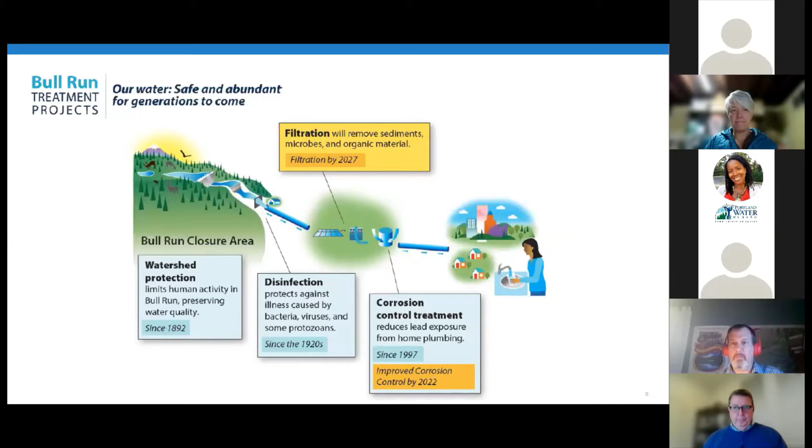Our improved corrosion control treatment project is currently under construction at our Lusted Hill facility. We're nearing the end of construction and will be beginning startup and commissioning in efforts to get that facility online in April of 2022. Most of the recent work has been continuing to connect to some of our existing systems at Lusted Hill and get those new systems up and running.

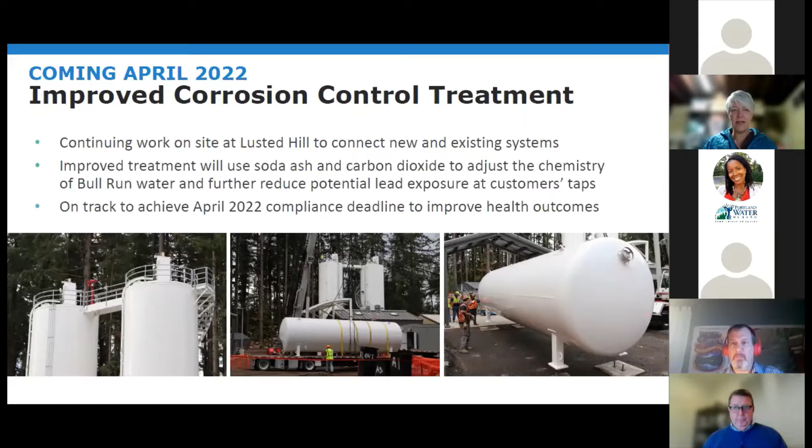The improved corrosion control treatment will use soda ash and carbon dioxide to adjust the chemistry of the Bull Run water and, as I mentioned, further reduce the potential lead exposure at customers' taps. We're on track to achieve our April 2022 compliance deadline to improve health outcomes. These are some photos of our site, with our soda ash silos on the left, and a carbon dioxide tank being delivered.

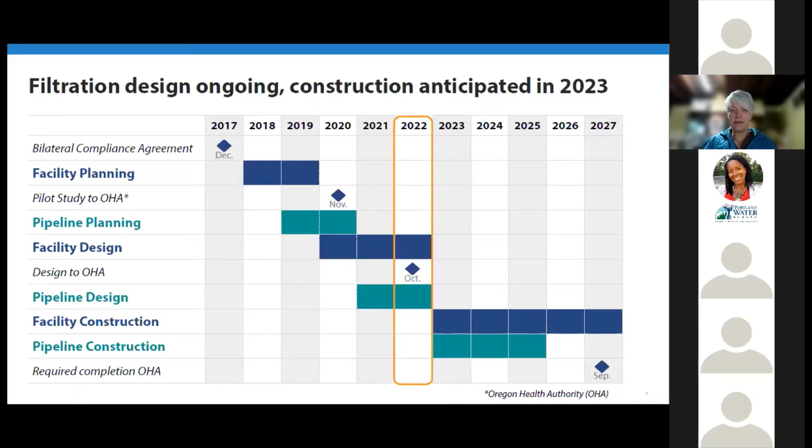And here we are in 2022, where we're continuing design of the filtration facility and the pipelines. We'll be submitting our design to OHA, the Oregon Health Authority, in October of this year, and anticipating starting construction in 2023. And with that, unless there are any questions, I think it's time to turn it over to Ken for a pipeline update.

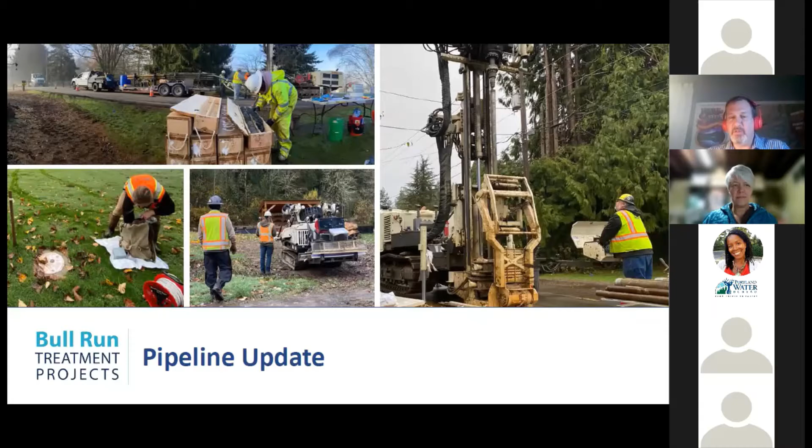Okay, so I'm Ken Ackerman with the Portland Water Bureau, and I'm leading the pipeline portion of the filtration program. Probably if we can go to the next slide.

Just an overview of the schedule, very similar to what we just saw. Planning was completed in '19 and '20. We started design in 2021. We have a design consultant that started a year ago, almost to the day, and they were very busy. We were out last spring doing a lot of work in the roads and on private property along the alignments, and then we had some additional information from field work in November and early December of last year. We'll continue through design this year and anticipate construction starting next year, continuing through 2027.

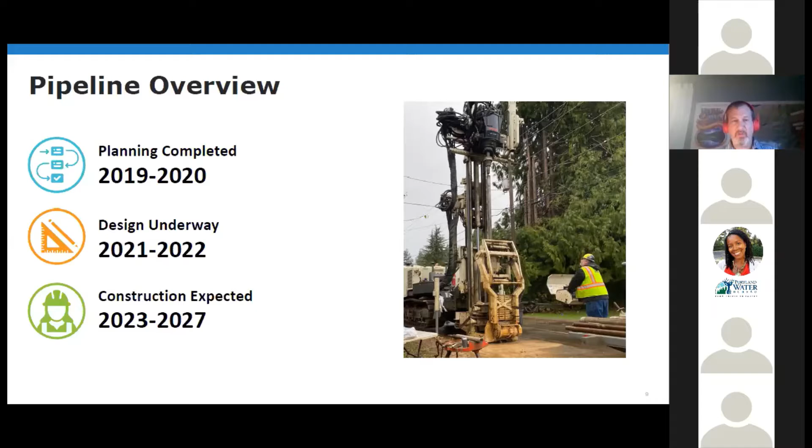I know we have some people here that haven't seen the overall alignments, so I want to run through those, and there are some changes here from what people have seen in the past. I'll start on the southeast side on our unfiltered water, which is the green on the right side of the picture there, starting at our Hudson facility.

We have an existing facility at the south end there, and we'll be connecting into that. We'll run a single pipe from there, crossing Lusted Road, in an easement we purchased back in the 80s along some private property, a 100-foot wide easement. Up north, we'll cross Dodge Park Boulevard and then cross Bear Creek. We'll be boring under Bear Creek, so we won't dig across it, but go underneath without impacting it, continuing in the easement up to the Multnomah County line, where we'll turn about 90 degrees to the west.

That's where we'll meet up with our second pipe that connects to the existing pipes in Lusted Road. We have all three of our existing pipes that supply water to Portland in Lusted Road at that point, so we'll be connecting into those. The two pipes will become parallel, and at that point we'll enter a tunnel. We'll be digging a tunnel from below, or east of Dodge Park Boulevard, under Dodge Park Boulevard up to the filtration facility. At the filtration facility, we'll have a shaft dug straight down, tie into the tunnel, and the pipes will come up onto the filtration site.

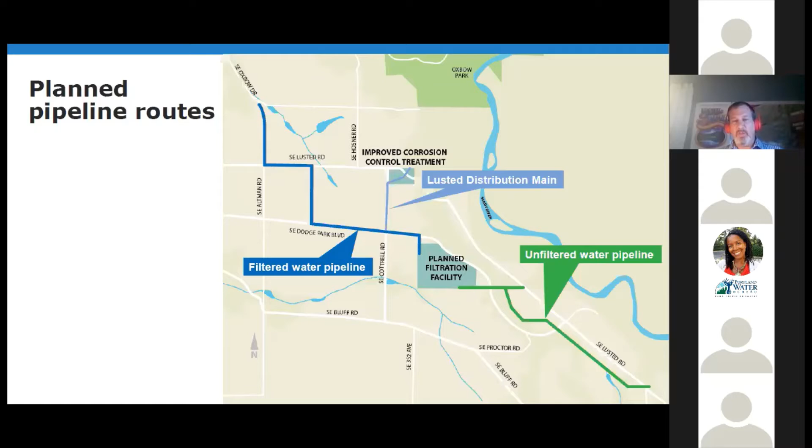So with that, the next slide, we are going to introduce Joe Cecil. We have hired our contractor, our CMGC, it's Bull Run Conveyance Partners, and Joe Cecil is leading their effort and just actually got a signed contract today. So Joe is just on board. We thought we'd bring him, have him introduce himself and the company a little bit, and then he will be back in April to talk more once he gets up to speed on what the project is. So Joe, with that, I'll introduce you.

Excellent. Thank you, Ken. I appreciate it. And good evening, everybody. As Ken said, my name is Joe Cecil. I'm the pre-construction manager as part of the Bull Run Conveyance Partners. As Ken referenced, we're the CMGC on the project for the Bull Run Pipeline project. Excited to be joined as part of the program and part of the team. And as Ken said, we just had a signed contract this morning, so we're just starting and just getting involved.

Our first task is the pre-construction effort, working closely with the program team and all the work they've done to date, along with the design team, focusing on safety, constructability, and minimizing disturbance and impact to the community. We're working on how we're going to sequence the project, traffic control associated with the project, and preparing our overall construction management plan to put all the procedures and process in place before we move into construction in 2023. Our focus in pre-construction is to have a successful, safe construction project that reduces and minimizes any impact to the community, any negative disturbances. So excited to be part of the team and excited to be working with everybody on it.

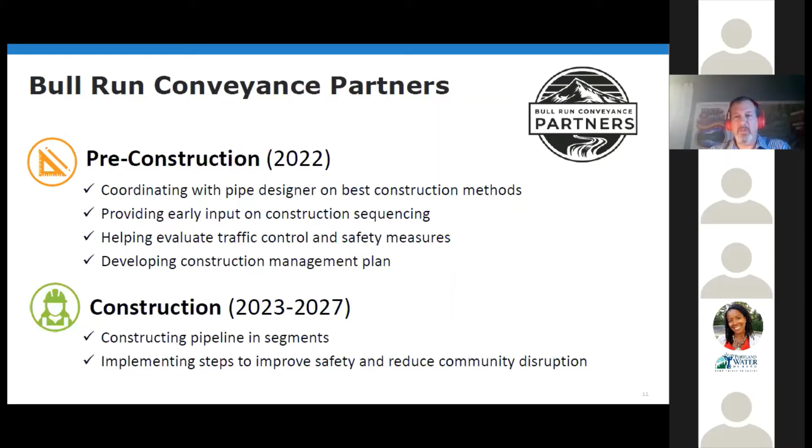All right, I believe Dave is up next. Program update, the facility update.

Okay, well good evening everyone. Glad to be here with you in this new year. And I have the opportunity to talk a little bit about what's been happening with the filtration facility itself.

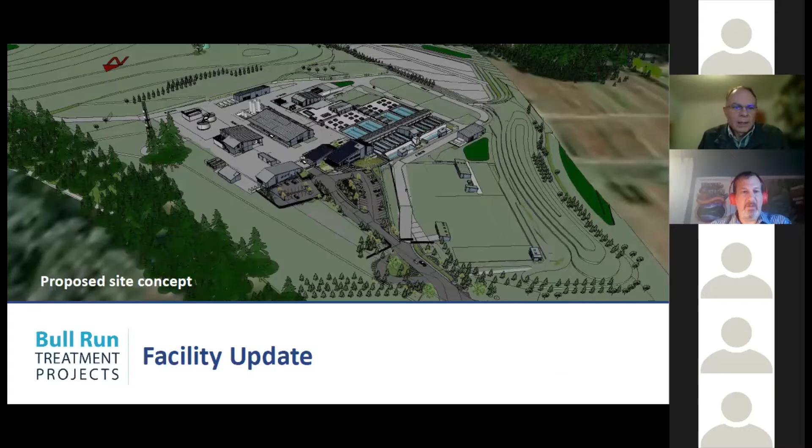And we'll go to the next slide. Over the past year, we have been talking to you about the design that's been moving forward. And I think, as Benita mentioned, back in September, we brought some graphics of how that's been moving forward. We're continuing to understand what we need to do to be able to place this facility here. And one of the things I'll be talking about tonight is the land use process that we'll need to go through in both Multnomah and Clackamas counties. At the same time, we'll be working through the land use, we're working on our design for a submission to the Oregon Health Authority to meet our October of 2022 design compliance milestones. So I'll talk a little bit more about those items this evening.

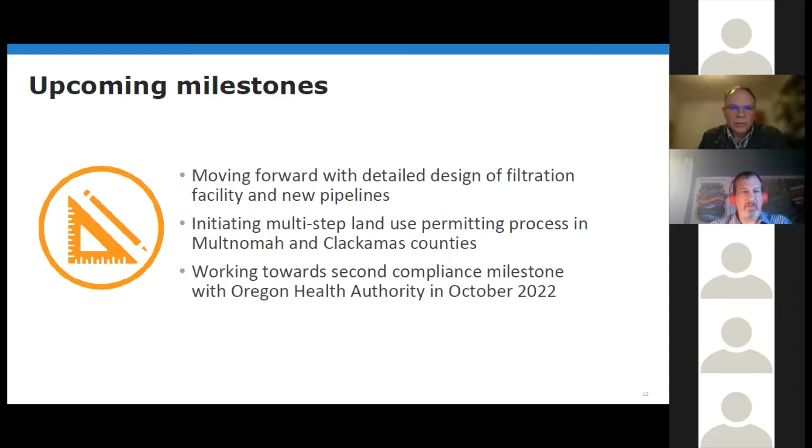Next slide. So first off is talking a little bit about the Multnomah County land use permitting process. This is a public process that we'll be going through, and there's several key steps that we need to go through as part of that process. The first one will be a pre-application conference that we'll be doing with the county. I'll talk about that in a minute and what that entails and what we hope to get out of that and when that will happen.

Once the pre-application conference takes place, within, I believe, 6 months of the pre-application conference, we need to submit a land use application. The county then does a review of that application, and once it determines it's complete, it goes through a process of accepting public comment on the application, and also goes through public hearings, ultimately getting to the point that a hearings officer will hear the merits of our case and any public comments and render a decision on whether we've appropriately met all the criteria to place our facility at this site. This will be the process for you, the public, to be able to come in and have comment and input into what we plan to build at this site.

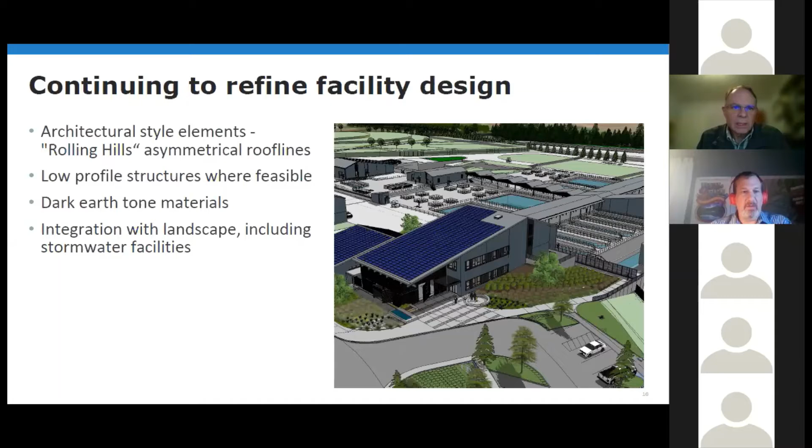We're working to use muted earth tones as the materials and colors for the facilities, so that it blends with the environment out there. And then we're going to be using landscaping, berms, and stormwater facilities in a way to make it a more natural environment to screen our facilities. Over the next couple slides, I'll show a bit more about what that will look like.

This is a high-level overview to give a feel for some of the things we're doing to reduce the visual impact of our facilities.

Starting on the right-hand side, which in this photo is looking to the west, there's plantings and berms. We do plan to raise that area as a way to screen the facilities. So we'll have some berms, and then landscaping on top of those, and over time the landscaping will continue to provide additional screening of the facilities.

Moving to the left and the main entry - one of the things we've done there, we continue with the screening theme as we're coming up Carpenter Lane to the entrance. The entrance will be set back. The gates to our facility will be 150 feet off of Carpenter Lane, so there's room for vehicles to come in and get off the main road, and our facility won't be highly visible from that main road.

Continuing around to the east side, we've talked about a communication tower being on this site. We've placed that tower close to the trees. As with other towers we've had, we know we'll have requirements to paint the tower in colors consistent with the darker muted tones of the landscape, so that it will blend in.

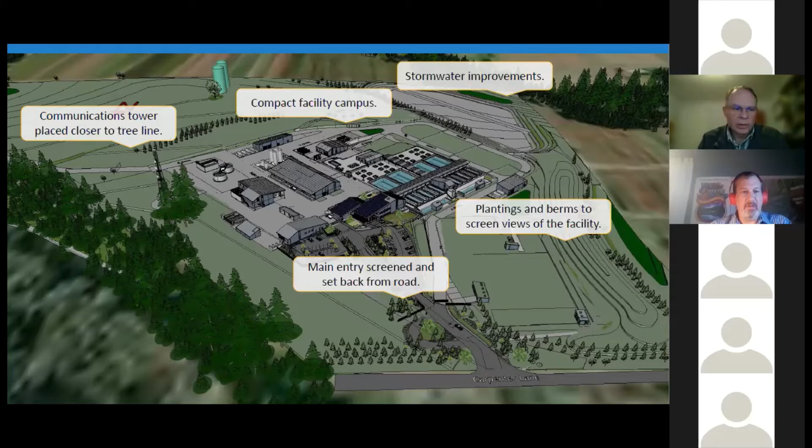On the next slide, we have a couple of views of how this will look from the edges of our property. The top half of this slide is looking from the west property line towards the east. On the right-hand side, you'll see the two green tanks, which are the Pleasant Home Water District tanks currently there, and in front of you, you'll see the berming and landscaping that will be visible from that point of view. As you scan across that horizon, there's a couple of white buildings in the middle there.

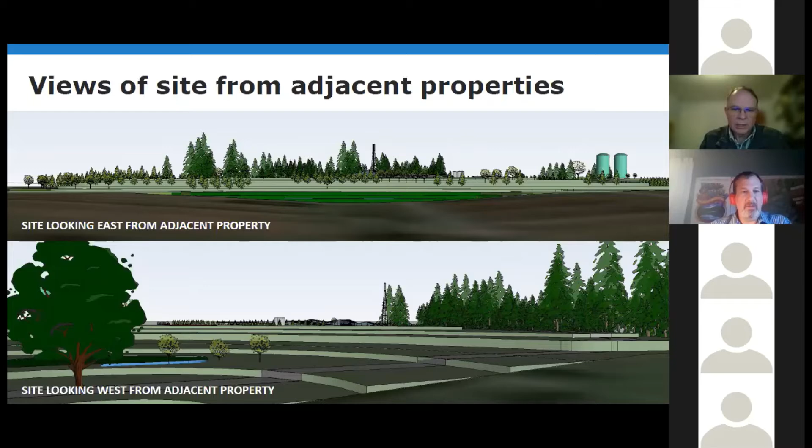Those will be the soda ash silos that will be part of our treatment process, and you can see the tower blending up against the trees in the middle of the site. The lower view is looking from the east property line back towards the west. In this picture, the Pleasant Home Water District tanks would be on the left-hand side behind the tree in front. As you scan across, you can see just the roof lines of the buildings, the white soda ash silos, and again the communications tower blending up against the trees.

The top portion of this slide is driving east on Carpenter Lane from Cottrell Road, approaching our west property boundary, looking off to the right-hand side - this is likely what you'd see. Pleasant Home Water District tanks off to the far right, some roof lines as we're going forward. The view in the corner is standing on that northwest corner of our property, looking into the property at ground level. The berms won't look step-graded like this - that's just a visual artifact of our modeling at this point. It'll look more like rolling hills, as I discussed earlier.

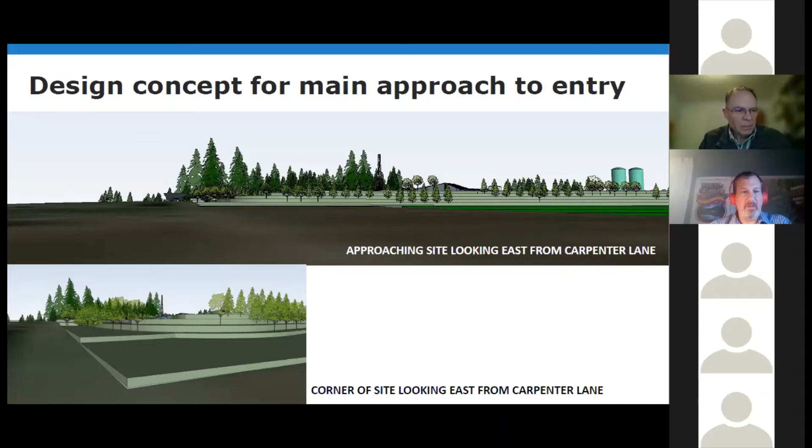Next slide - this is coming in off of Carpenter Lane. We showed the overview of that driveway and the gate being 150 feet back from the road. This is what that would look like standing on Carpenter Lane, looking towards the entrance of our facility, again using landscape to visually get the property to blend in. At ground level, as the landscaping ages and grows, it'll blend even further.

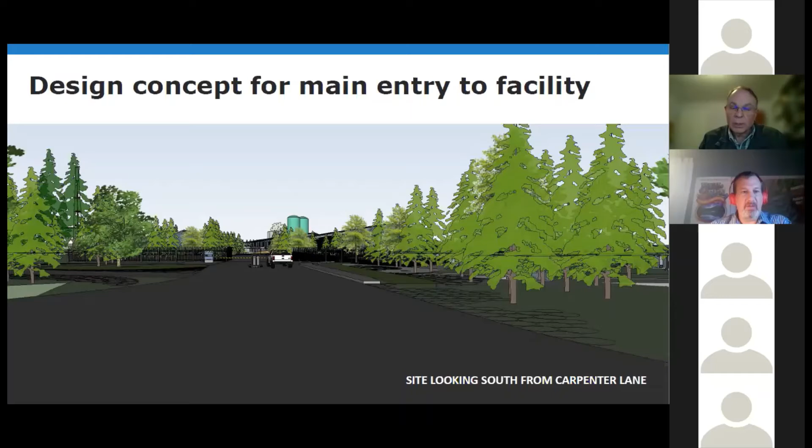I discussed briefly when showing the road view that our primary access will be coming in off of Dodge Park Boulevard onto Southeast Cottrell and then onto Carpenter Lane, with access directly into the facility off of Carpenter Lane. We do plan to have a secondary access to the south, to Bluff Road, for if something happens on Carpenter Lane or it's closed for any reason, so we have a way in and out - a backup for emergency access or anything like that. The secondary access is just that. All of our operations will come in off the primary access, where employees and deliveries will be had. The secondary access is really just for times of need when something else is happening on Carpenter Lane.

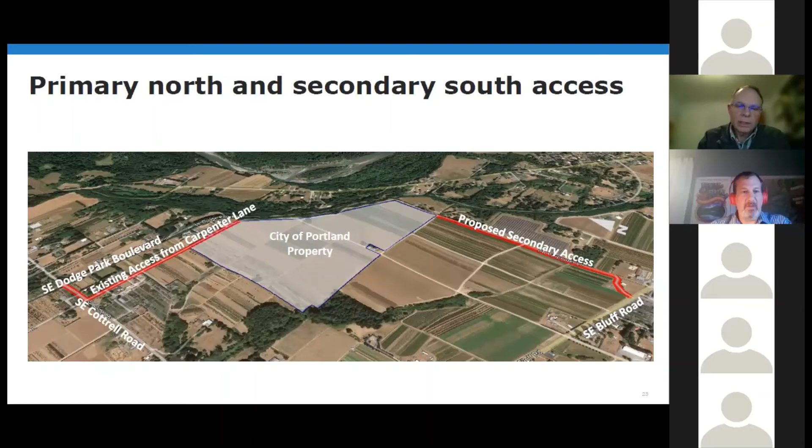So this is the overview of what we're thinking for access. We're still working on the designs of those facilities, so the exact locations are still being worked out as we're talking with property owners and the counties about where those intersections will be, both at property lines and existing roads. We're doing ongoing communications with those property owners to work out the details. We're working with Multnomah County specifically on intersection details and roadway standards within Carpenter Lane and what they'll require for the driveways into our site. We'll be working within the right-of-ways within Carpenter Lane, Cottrell, and Dodge Park Boulevard, so we aren't anticipating the need for any new property acquisition along those boundaries.

As we mentioned earlier, we have our contractors on board now, so we'll be working closely with them as we're thinking about traffic controls and how we provide access for you as local residents and emergency access during construction. We're committed to coming back at our next meeting in April to talk in more detail about those construction plans and how we'll keep your neighborhood safe during construction. All of this is continuing work to work out the details of these accesses.

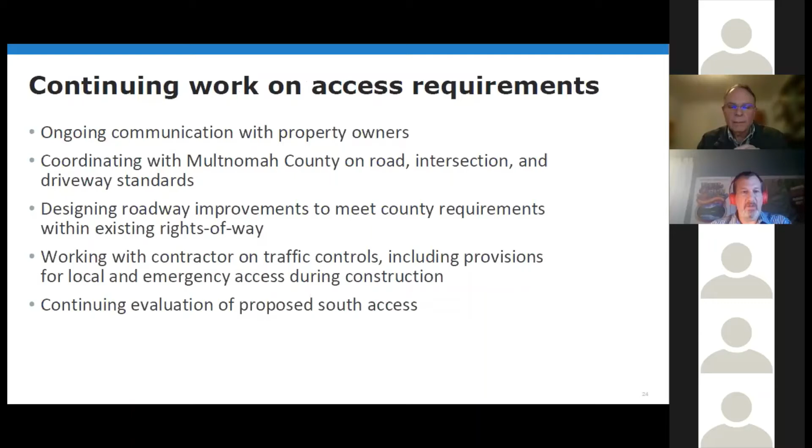I'm going to start with a question or statement from the Walters that's in the chat. It says: Dean and I are extremely disappointed regarding the recent discussion we had with a PWB rep. We were informed that the secondary access road to and from the property line on the eastern border of the proposed plant during construction means neighbors and residents of Carpenter Lane will have to deal with a large number of vehicles on the access roads, according to the Bull Run Filtration update regarding facility site access. The secondary access from the south is very vague. We would like to meet with those involved in this decision to show us exactly where the secondary access was chosen. They're in their 70s and feel as if they are part of the collateral damage.

So do you want to respond to that question? They don't have audio right now, so they'll have to listen to your response later.

We would like to meet with you and talk in more detail about that. As I mentioned, we're still working with property owners to the south to understand where we can locate the road and the details of that road. We're working with our contractors to understand how they're going to use the site during construction. That's all information we're collecting now, and we'd love to sit down with all the property owners to talk through those details and work through any concerns you have.